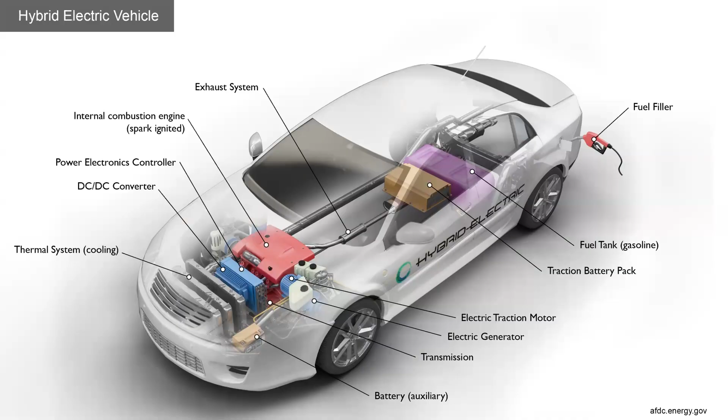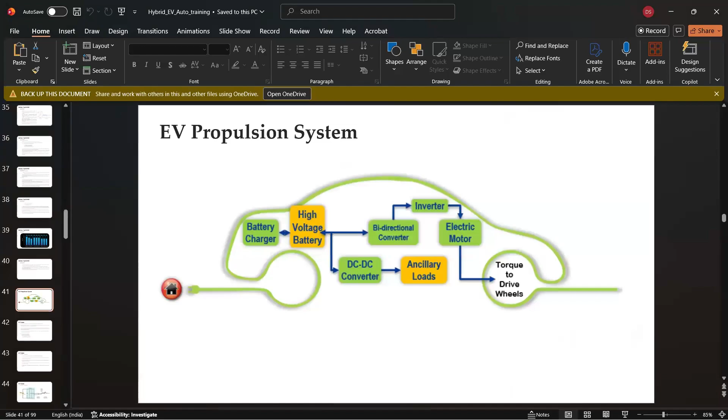The thing we will cover in this session is mostly the IC engine, the internal combustion engine, along with the motor. We will first cover the theory of the types of propulsion used in electric vehicles. Then we will go for modeling of those systems. The tools we will be using for modeling are Ricardo and MATLAB. In Ricardo, we will model the engine, and in MATLAB, we will model the hybrid architecture.

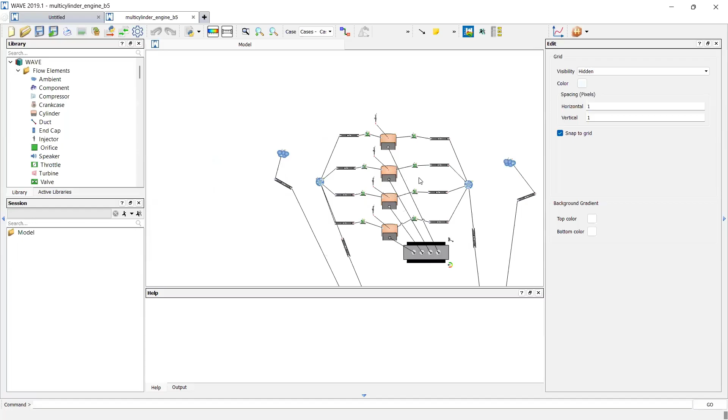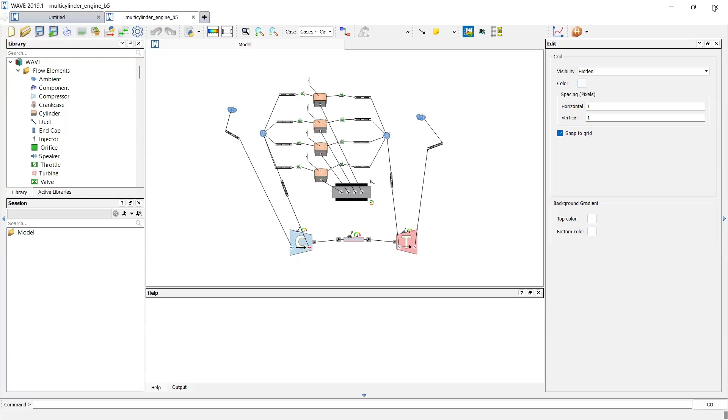Mostly what we will do in Ricardo is create the engine, the type of engine we want for our hybrid electric vehicle. Once the engine is modeled, we will save its parameters, like the torque versus RPM parameters, to use in our system modeling or hybrid powertrain modeling in MATLAB. There we will also have the characteristics of the motor, so we will combine it. After the sessions, you will get links to download MATLAB and also Ricardo to practice the models.

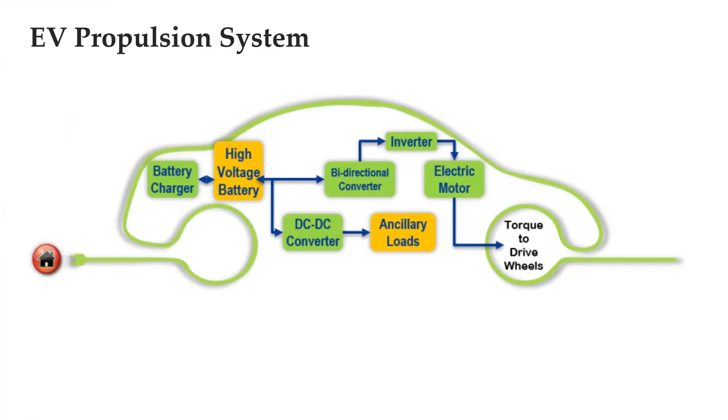So what is a propulsion system? EVs can run solely on electric propulsion, or they can have an ICE working alongside it. Having only batteries as the energy source constitutes the basic kind of EV, but there are kinds that employ other energy sources—these are called hybrid EVs. The International Electrotechnical Commission Technical Committee proposed that vehicles using two or more types of energy sources, storage, or converters can be called HEVs as long as at least one of those provides electrical energy. So it can have different kinds of energy supply, but it should also have an electric energy supply to be called a hybrid EV. It makes lots of combinations possible, like ICE-battery, battery-flywheel, battery-capacitor, or battery-fuel cell.

EVs can be categorized into battery electric vehicle (full electric), hybrid electric vehicle (ICE running alongside motors), and plug-in hybrid electric vehicle. In the hybrid, the engine is also charging the cell, so it's one complete unit—you don't need any external charger, you can just charge it from the engine. Plug-in hybrid means you can charge it externally. Most of the hybrids coming now are plug-in hybrids.

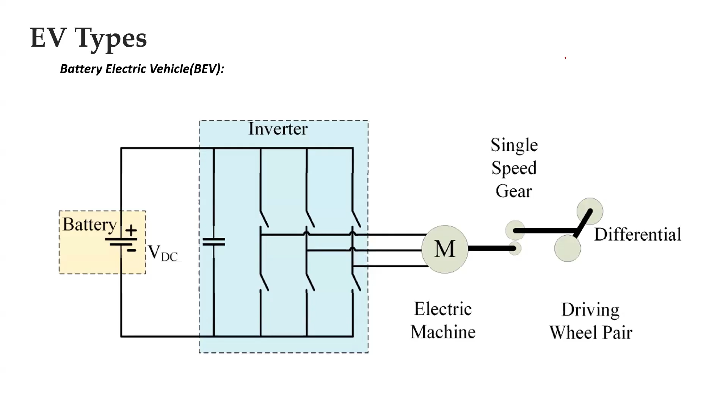Electric propulsion provides instant power, same as before. Then comes the hybrid electric vehicle. HEVs employ both an ICE and an electric powertrain to power the vehicle, and the combination can come in different forms. HEV uses electric propulsion where power demand is low. In hybrid electric vehicles there are also two types: high level hybrids and low level hybrids. High level hybrids are those in which the motor is the main driving source while the engine assists it. Low level hybrid means the engine is the main driving force for the wheels and the motor assists it.

HEV uses electric propulsion whenever power demand is low, so the motor generally consumes less power compared to the engine—because what a 90 kilowatt engine gives you, you can get the same from a 30 or 40 kilowatt motor. When the motor consumes less power, your energy consumption becomes more efficient. If you compare an engine vehicle with an electric vehicle of the same size for four persons, the IC vehicle consumes more power because it is less efficient. For passenger cars, the engine can reach a maximum efficiency of up to 45 to 50%.

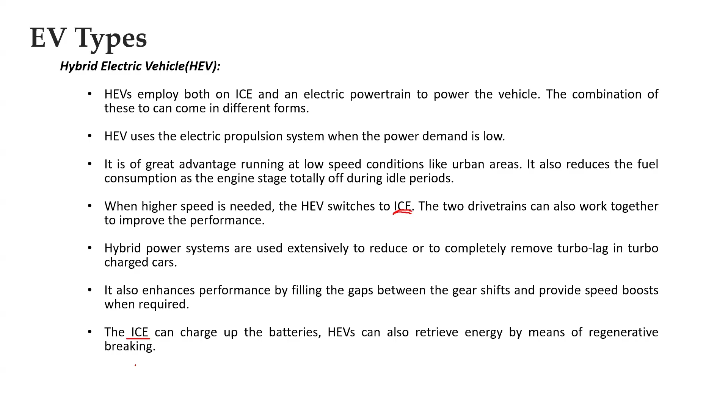Speed boosts when required, the ICE can charge up the batteries. This is without plug-in hybrid, completely onboard charger. That means the engine will charge the cells. HEVs can also retrieve energy by means of regenerative braking.

So in the hybrid electric vehicle architecture, you can see battery, electric motor, ICE, and powertrain. The motor also acts as a generator. During starting, the ICE powers the electric motor because the ICE can power heavily. Remember, this is a closed hybrid I'm talking about, not a plug-in hybrid. Closed means the ICE also charges the battery through the motor; there is no external charger.

So the conditions are: starting, stopped, passing or overtaking, braking, and cruising. For overtaking, you need more acceleration because there is a vehicle at the same speed that you are overtaking, so you need more speed in less time, and you will go for ICE assistance. During braking, the motor also charges the battery through regeneration. In cruising, mostly ICE takes over; it also charges the battery, keeping the energy within the vehicle and runs the powertrain.

HEVs are primarily IC-driven cars that use an electric drivetrain to improve mileage or enhance performance. While starting the vehicle, the IC can run the motor as a generator to produce some more power and store it. During overtaking, a boost in speed is required so both the IC and the motor give power to the powertrain. During braking, the powertrain runs the motor as a generator to charge the battery by regenerative braking. While cruising, the ICE runs both the vehicle and the motor as generator, which charges the battery.

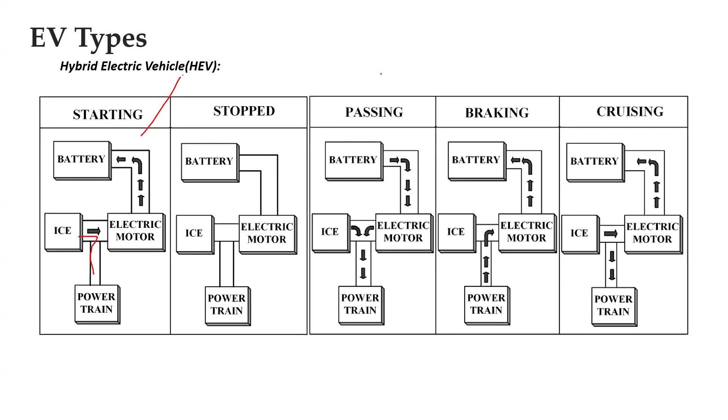But in plug-in hybrids, you can externally charge the cells. This is where it comes in - if you want to charge your cells now, if you want to extend your battery pack uses, you can use a plug-in hybrid. The plug-in hybrid concept arose to extend the all-electric range of the HEV. It uses both IC and electric powertrain like an HEV, but the difference is that the plug-in hybrid electric vehicle uses electric propulsion as the main driving force. In a hybrid where there was no charging point, the engine was the main driving force, so it was a low-level hybridization. In a plug-in hybrid, since you can charge the battery pack, the motor can be given the primary task of driving the vehicle.

So here this is a high-level hybridization. Plug-in hybrids all start in all-electric mode, running directly on batteries. When batteries are low in charge, it calls on the IC to provide a boost and charge the battery pack. The IC is used here to extend the range. Plug-in hybrid electric vehicles can charge their battery directly from the grid and can also utilize regenerative braking. Their ability to run solely on electricity for most of the time makes their carbon footprint smaller. Chevrolet Volt and Toyota Prius are well-known plug-in hybrid electric vehicles.

Then there are fuel cell electric vehicles. In a fuel cell electric vehicle, the fuel cell cannot directly drive the vehicle. Mostly there's a fuel cell, a battery pack, and a motor. The motor drives the vehicle. Batteries can be charged externally, and the battery can also be charged through the fuel cell.

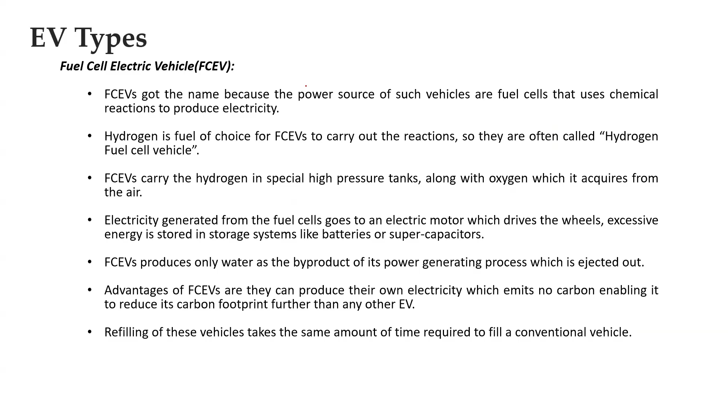Now we know the different kinds of power setups we can have: engine, motor, and fuel cell. These power setups create different types of power flow combinations known as series combination, parallel combination, series-parallel combination, and complex combination.

EVs have different configurations. It can have a gearbox and a clutch that allows high torque at low speed and low torque at high speed, obviously.

Mechanical interaction can be further reduced by placing the motors inside the wheels to produce in-wheel drive. Planetary gear systems are employed here because of their advantage of high speed reduction ratio and inline arrangement of input and output shafts.

Mostly, the power split is done through a planetary gearbox. We will see a planetary gearbox here, which can have multiple stages. Mostly, if you're using one planetary gearbox, it can have three inputs and outputs. If you use a multi-stage planetary gearbox, you can have multiple combinations of inputs and outputs.

This feature of the planetary gearbox gives it lots of advantages to be used in hybrid electric vehicles, because you can connect a motor, an engine, and a generator directly to a single gearbox.

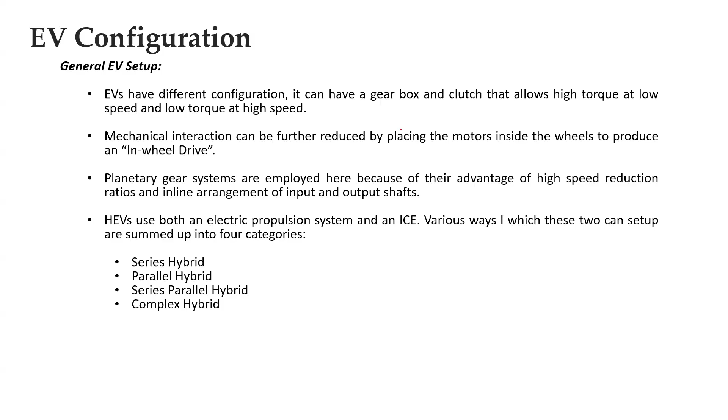So why is this a high level hybrid? It is because the motor is directly taking part in driving the vehicle, and the engine is assisting the motor in driving the vehicle.

What is the advantage of this kind of system? The advantages include an efficient and power optimized plant, possibility of a modular power plant, optimized driveline, possibility of swift black box service exchange, long running time, mature technology, fast response, and zero emission.

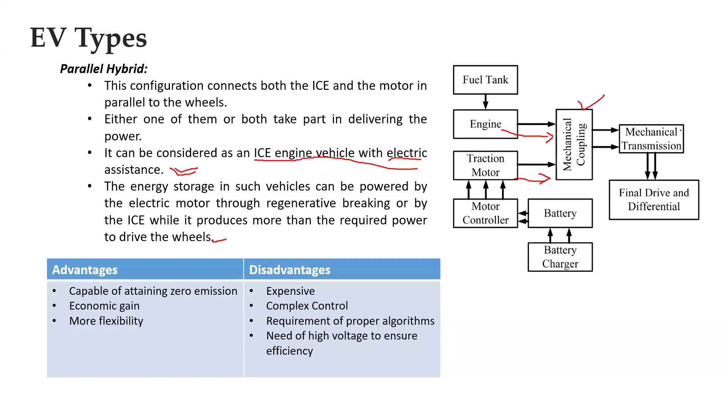Then comes your series-parallel hybrid. Here you can have ring here and carrier here. You can see that it sometimes rotates quickly, sometimes slowly. So you can see this is a planetary gearbox.

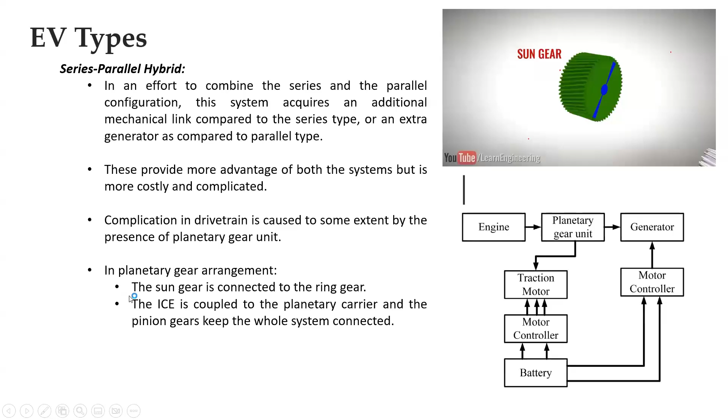Generally, you can connect multiple inputs and outputs here. Planet gears, ring gear, and carrier. You can see that it's up.

So you can see how it is connected. Generally this is the motor. This ring gear is connected to the main driving motor that will be connected to the wheel. The planet carrier, here the engine will be connected. Generally the engine is connected to the planet carrier.

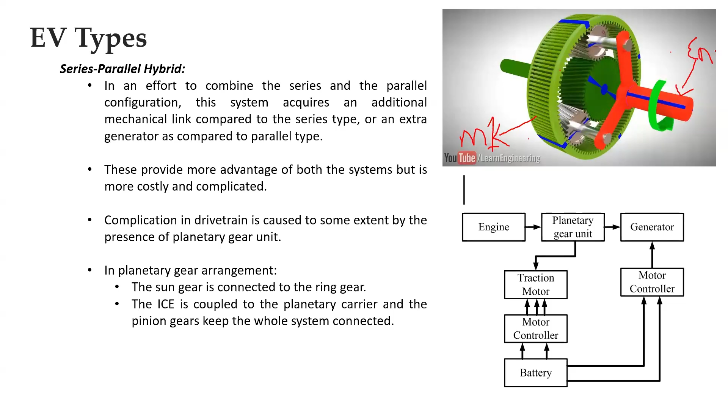And in the sun gear, generally your generator is connected. M1 means your motor, the main driving motor. The planet carriers are connected to the engine, and the generator is connected to the sun gear. This is how your planetary gearbox setup is.

Now we can have multiple configurations, like we can run the engine keeping the generator fixed, which will generally increase the output of M1. Let's play it a little more so you can see. Sometimes it rotates quickly, sometimes slowly, and sometimes even in reverse.

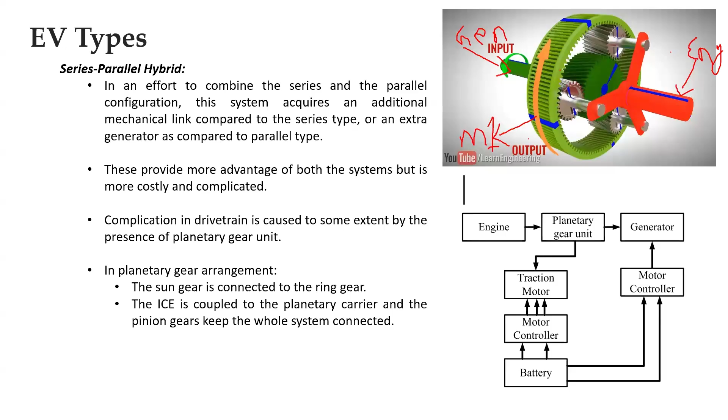Series means we can use the engine to run the generator, which charges the battery, which drives the motor, which drives the wheels. Parallel means we can also use the engine and the motor to drive the wheel, and the generator will be fixed at that point, driving the system. This is series, so we are getting both series and parallel combinations.

Then series-parallel hybrid, a less complex alternative to this system, is used: transmotor, which is a floating stator electric machine. Another kind of series hybrid can also be done by using a floating stator motor. Floating stator means, actually this is mostly this one.

Like what happens is... just give me 1 minute.

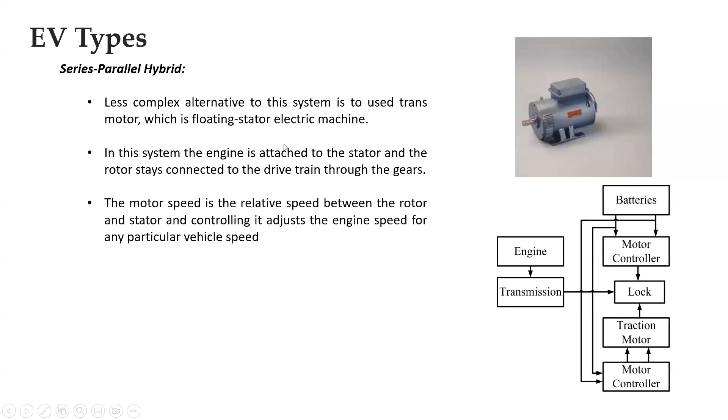Four-wheel drive means the main engine will be there, two motors will be there. Both the motors can also act as a generator. That is your four-wheel drive system.

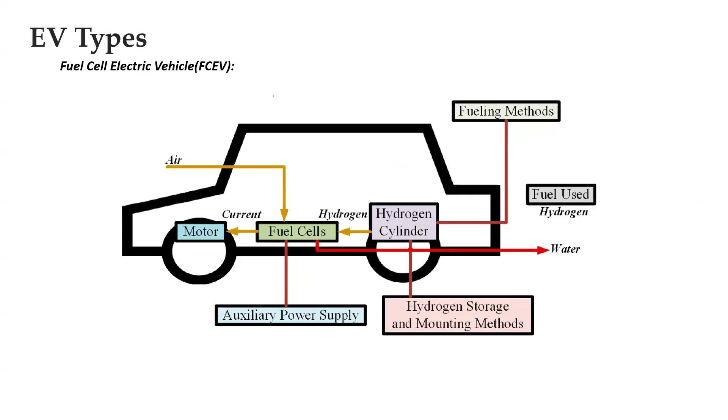Then you can have different architectures. I think most of you got it, what are the different setups that we have. Since today is the theoretical session, we will see different setups. In the next session, we'll go for modeling the engine, and then we will use our engine and motor to model the hybrid powertrain using MATLAB. Since some attendees are not able to join due to the trouble, we will end this session a little early.

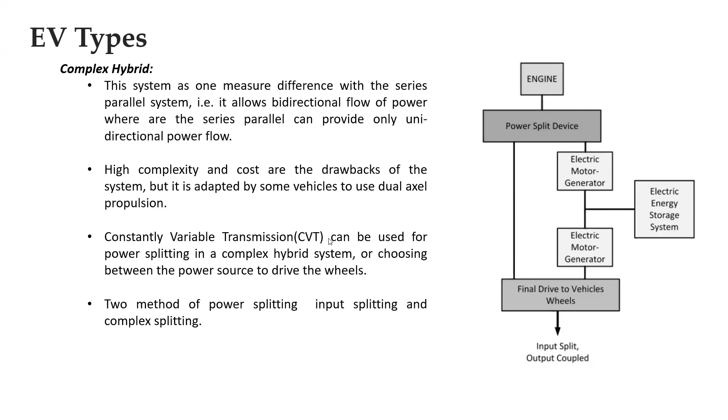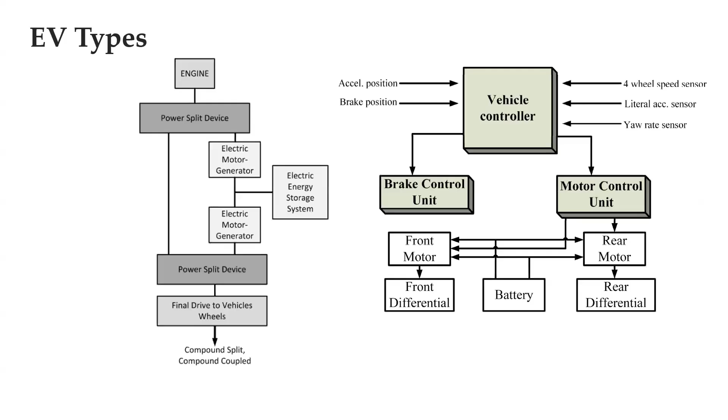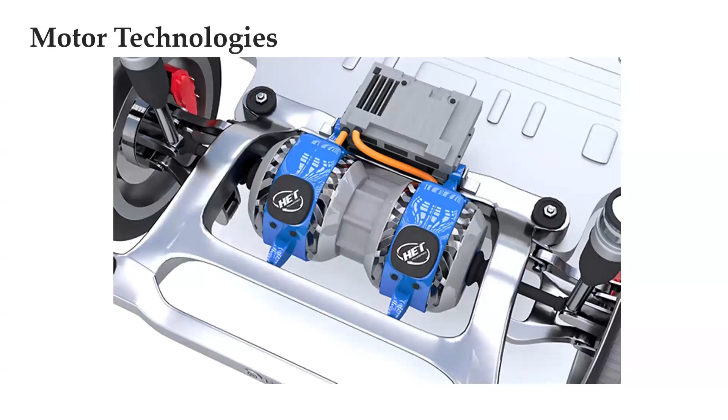I think most of you got about the complex hybrids and power split devices. Next comes the motor technology. Without knowing the motor, now we know the powertrain, engine is also mostly done. So we know the powertrain, different series, parallel setups. Now what are the different motor technologies that are used? We will cover this briefly.

So what is a motor? Motor is a machine that converts electrical energy to mechanical energy. And motor also acts as a generator, meaning it can also convert mechanical energy to electrical energy. There are different features of a motor. If you want to select a motor for electric vehicle application, it should have high power.

It should have high power, high torque, wide speed range, because your electric drive, if it is in traffic, will run at a very slow speed, 20 km per hour. The motor generally heats up at low speed because lots of current flows, due to the architecture. At low speed, motors will have high torque, and if you sustain that torque for a longer time period, it may damage the motor. So motors should be selected such that they can adapt to slow speed and also high speed, with high efficiency, reliability, robustness, low noise, reasonable cost, and small size.

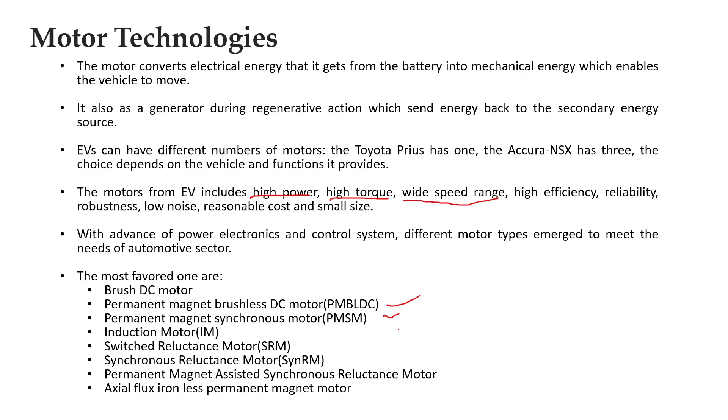With advances in power electronics and control systems, different motor types emerged to meet the needs of the automotive sector: brushed DC motor, permanent magnet brushless DC motor, and permanent magnet synchronous motor. Synchronous motors are the ones currently used in vehicles. So you can see we have different motor configurations here, like PM BLDC and PM SM. First is your brushed DC motor.

So, brushed DC motor. These were the early motors used in electric vehicles. Now these are not used at all. Why were they used in early days? Because brushed DC motors tend to generate a lot of torque, due to their construction - they carry a lot of inertia, so they generate a lot of torque. But engineers got an acute problem using these motors: since the energy concentration is at the core, and there's an air gap between the core and the casing, heat accumulation is imminent and cannot be removed easily from these devices. So wide speed operation is not available in these kinds of motors.

If the PWM frequency is, let's say, 60 kilohertz, or let's say 100 hertz, then the RPM output of the motor will be an integral multiple of that, like 200 RPM or 300 RPM. So it's an integral multiple of the PWM. If the PWM frequency is, let's say, 75 hertz, then RPM will be a multiple of 75, that is 150 RPM, or it will be 300 RPM. So it will be an integral multiple.

Now sir, why does this help? It is because the PWM frequency is sent by whom? Your microcontroller generates the PWM frequency and sends it to the drivers, and the drivers drive the motor with respect to that frequency. If we don't have this proper connection between the PWM and the RPM, then we cannot have sync.

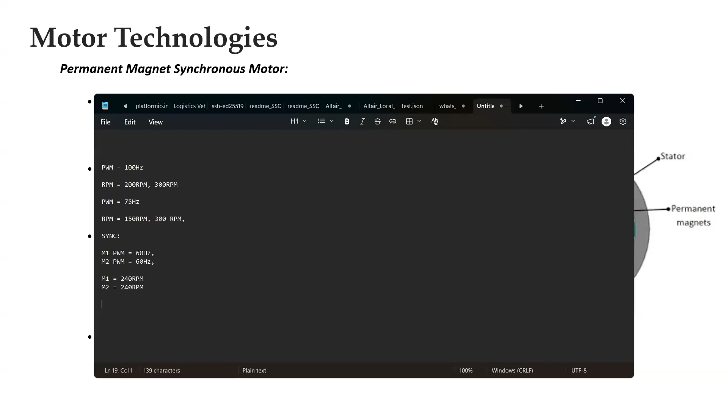If I go for async, that is not synchronous. Async motors generally use voltage, they also use duty cycle, but their driver is not sync. Here if M1 PWM is 60 hertz and M2 PWM is the same 60 hertz, M1 RPM can be 230 RPM while M2 RPM can be 270 RPM. This is async, meaning same PWM frequency but different RPMs. Sync means same PWM frequency and the RPMs are integral multiples of that frequency.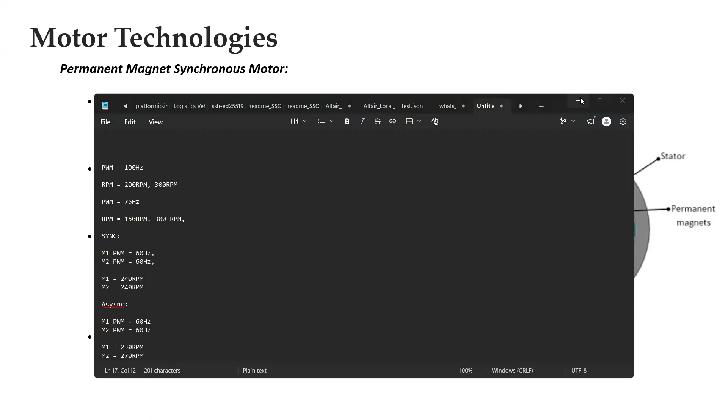So this can be easily achieved. Synchronous technology is generally a driver technology, meaning even if we have 100 drivers, if I provide 60 hertz, the driver is going to run the motor at an integral multiple. It's not a fixed RPM, but an integral multiple. Clear or not? So that is the synchronous technology.

Then comes the induction motor. Induction motor means we know that induction motors don't have any permanent magnets in them; they are magnet-free motors. The general principle is magnetic induction. The rotor is a soft iron core — you can see this rotor is a soft iron core. The stator magnetizes the rotor and controls it, so the rotor is not a permanent magnet.

So here there is no field weakening. In a permanent magnet motor, there will be field weakening because permanent magnets can lose their magnetism. But in an induction motor, there's nothing to lose its magnetism — it's a soft iron core. It can be magnetized and demagnetized thousands of times. So induction motors are the first choice of electric drives.

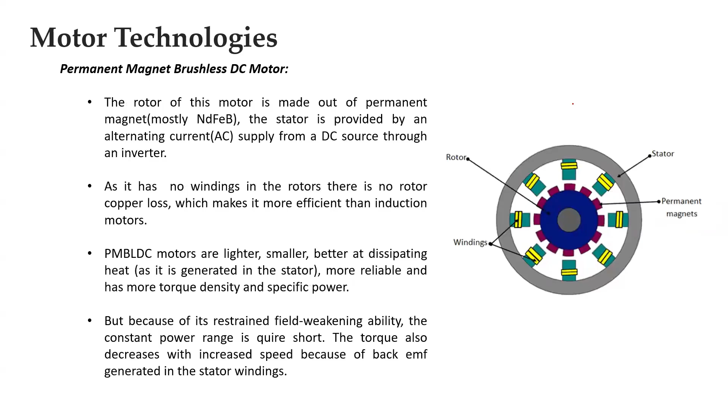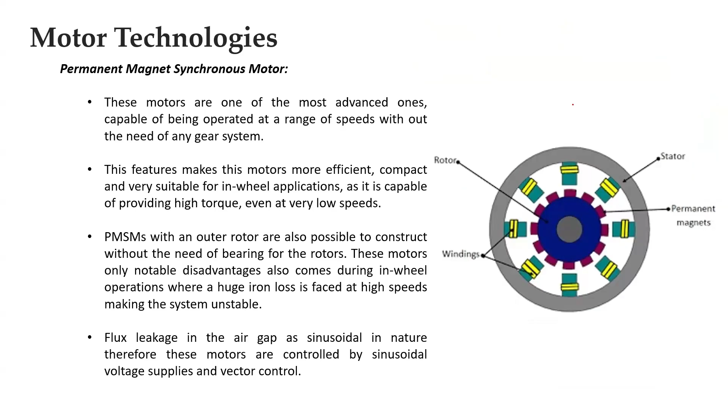But sir, nowadays we see that the permanent magnet synchronous motor is widely used. Yes, induction motors are used in some electric vehicles — mostly Teslas use induction motors. Tata Nexon, Mahindra, they all use permanent magnet motors. Why? Because the reliability of a permanent magnet motor is very good compared to an induction motor. So why go for a costlier technology? Induction drives are more costly compared to permanent magnet motor drives, because with induction motors you have to control their strategy and algorithm — the driver is costly, the motor construction is costly. In a permanent magnet synchronous motor, the motor construction is easy, the driver design is also easy, and the algorithms are also easy.

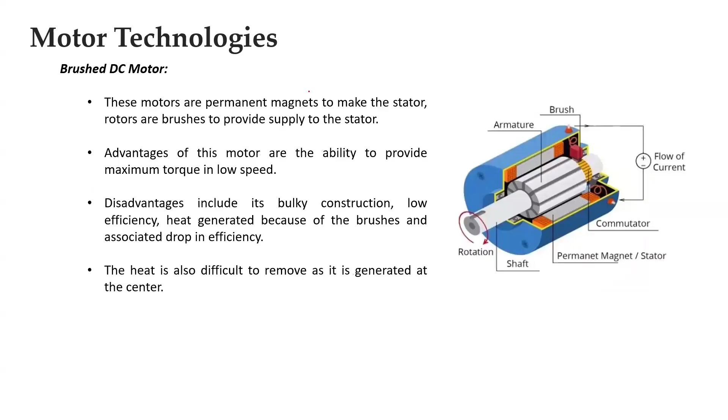Then comes the switched reluctance motor — these are a new kind of motor, and their working principle is different. What is the working principle of all these motors generally? Keep both the rotor and stator magnetic fields perpendicular to each other, to generate the maximum amount of torque. So in all these motors, generally the rotor will follow the stator. We switch the direction of the stator and the rotor follows it. We don't want the rotor to align with the stator, because then the RPM will be zero, so we switch it so the rotor follows the stator.

But that is not the case for a switched reluctance motor. In a switched reluctance motor, the rotor and stator are both at 0 degrees, not 90 degrees, so they use magnetic reluctance. Magnetic reluctance means that when two magnets are joined, it's difficult to separate them — that's what happens here. When we magnetize the motor, the rotor and stator become one connected pair. We don't switch the rotor or the stator, so the rotor doesn't follow it; the rotor and stator just become fixed to a magnetic field, and when we rotate the magnetic field, the rotor rotates along with it.